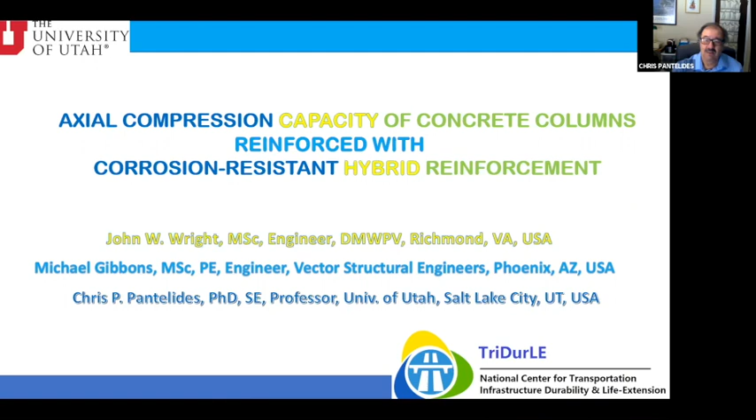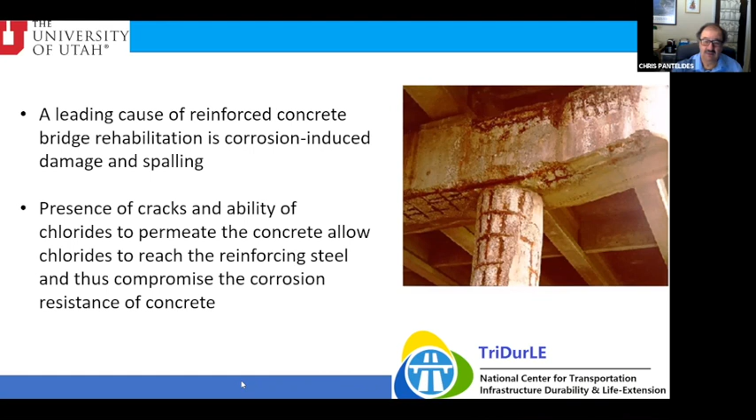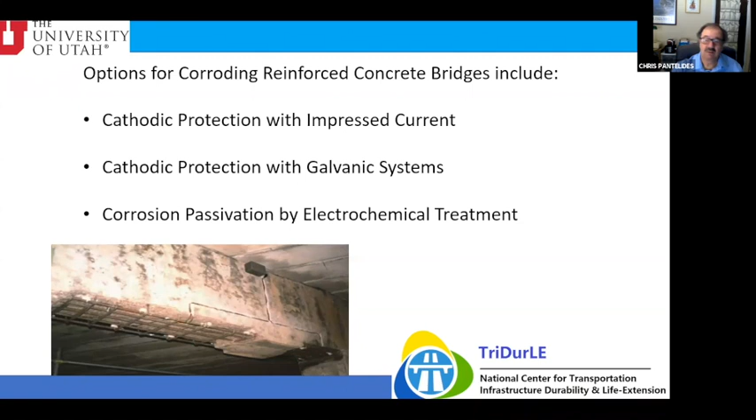Options for corroding reinforced concrete bridges include, as you know, cathodic protection with impressed current, cathodic protection with galvanic systems, and corrosion passivation by electrochemical treatment. Here, I'm going to show you today some alternative reinforcement options for new reinforced concrete bridges. This reinforcement will result in both initial and life cycle cost savings, as it will eliminate the need for replacement and could provide over 100 years of service life with minimal maintenance.

In this talk, I'm combining these two students' work on something called hybrid reinforcement for new concrete columns, which means glass fiber reinforced polymer. This could be in the form of a spiral or longitudinal bar. 2304 duplex stainless, which also could be in the form of spiral and longitudinal bar, and 316L stainless clad longitudinal bar - we were not able to obtain this stainless clad in a spiral. And of course, we have all carbon steel bars.

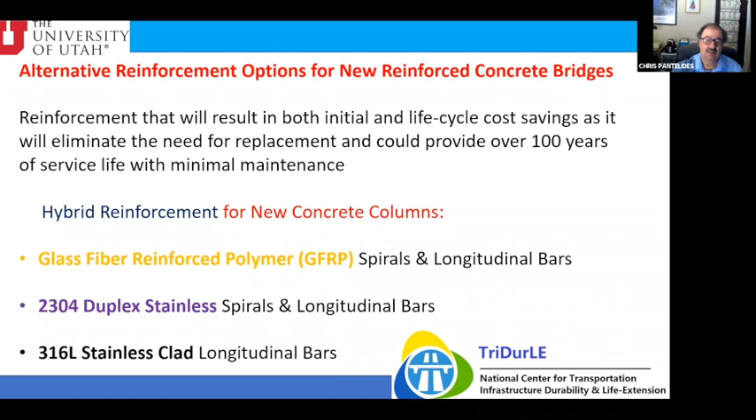First, for those who are not familiar, glass fiber reinforced polymer spiral and longitudinal bars. This material has been used in structural applications in both straight and fabricated bend form. It's a lightweight fiberglass rebar, a composite of fiberglass roving and resin that's impervious to corrosion. This is ideal for structures exposed to de-icing salts, seawater, other corrosive agents, weight or thermally sensitive projects, and projects that require electromagnetic neutrality. Actually, this last one was one of the first reasons this Aslan 100 fiberglass was used.

This Aslan 100 is stocked in 20 and 40-foot lengths from number 2 to number 8, and also number 10 diameter bars. Number 11 to number 13 diameter bars can be made to order. Here you can see a cast-in-place GFRP reinforced concrete deck.

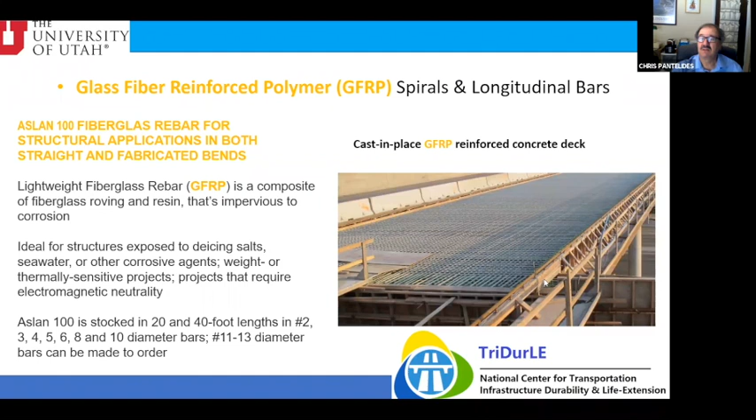So what are the properties? We've tested them. The ultimate tensile strength is 725 megapascal, it's a linear elastic material. Ultimate tensile strain is 1.6%. The compressive strength we measure indirectly, about 49% of the tensile strength.

The way we did that is by averaging the strain gauge readings from the vertical bars in the compression test of our column specimens. Measured compressive strain about 0.8%, elastic modulus 46 gigapascal.

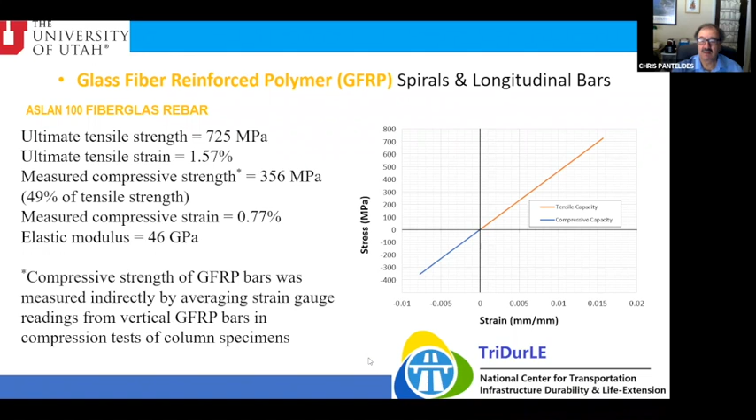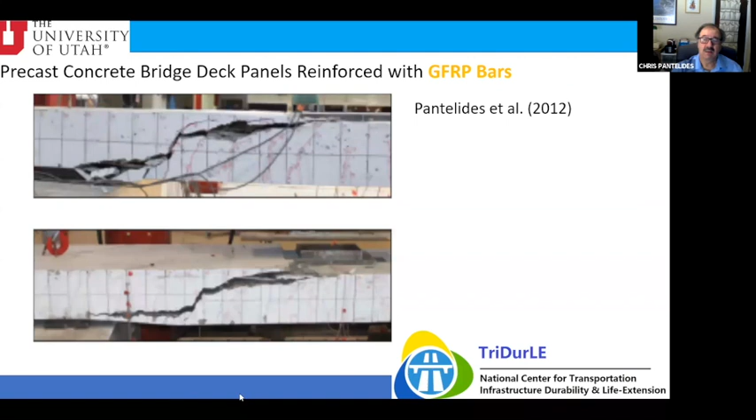Here you see some work we did earlier on precast concrete bridge deck panels reinforced only with glass fiber reinforced polymer bars. Later on, this work took form of an actual bridge on US 6 near Price, Utah. This was precast panels, about 45 feet long and 7.5 feet wide, and these were reinforced only with fiberglass bars.

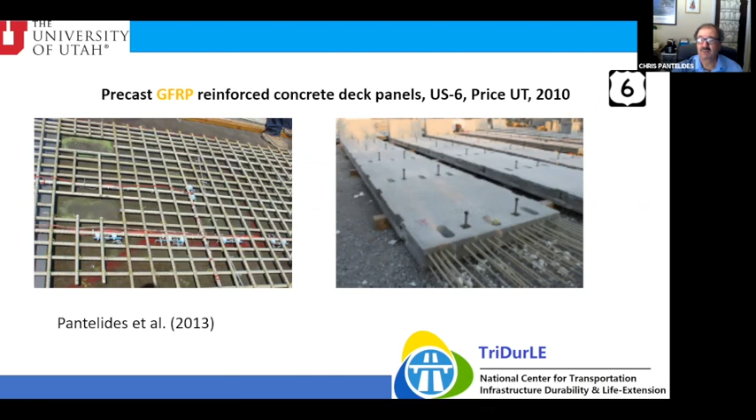These glass fiber reinforced polymer panels were then put on trucks and driven 130 miles to the site. You can see these panels being lifted where they were cast and being dropped on top of the bridge girders, just regular AASHTO type girders on this bridge on US 6. This bridge, by the way, has been in service now for 10 years with no sign of corrosion or any other degradation.

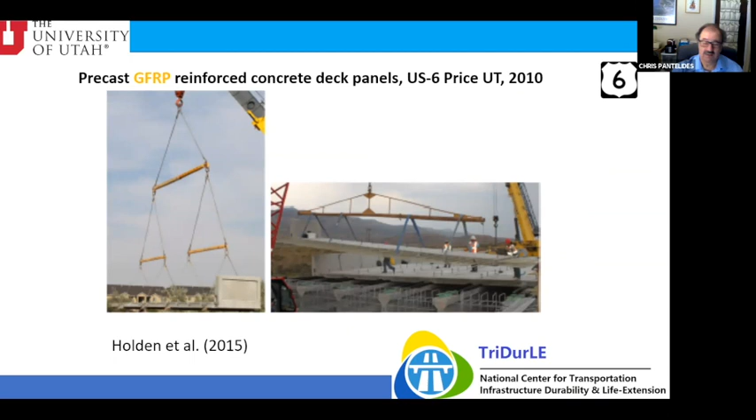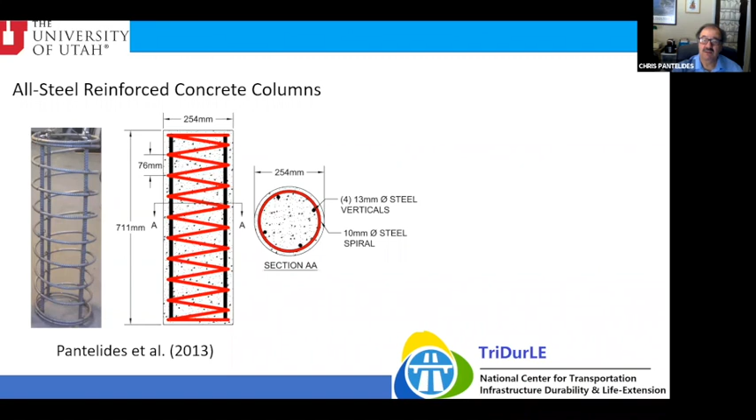Here it shows you the first study, the initial study we did for corrosion. This is the study that Mike Gibbons was involved in. You can see these columns are 254 millimeters diameter, 711 millimeters tall, and this is all steel, all carbon steel reinforced. You can see 4, 13 millimeter steel verticals and 10 millimeter steel spiral at 76 millimeter pitch.

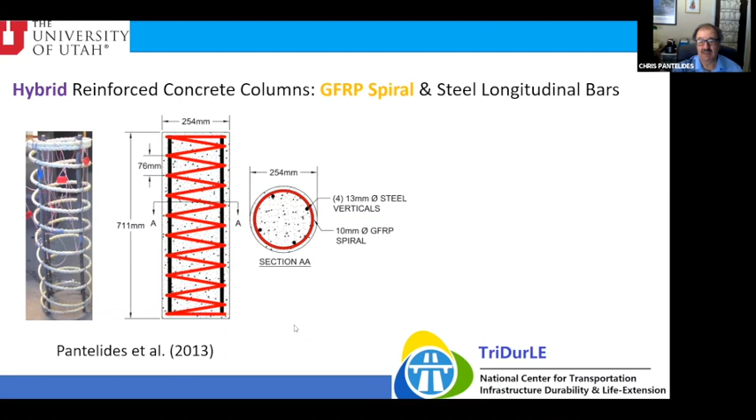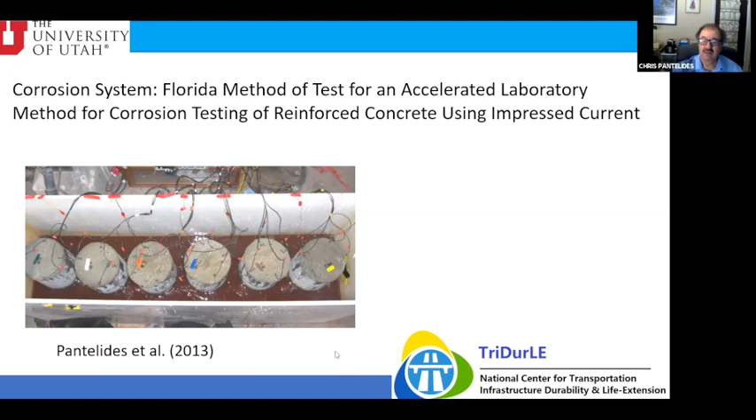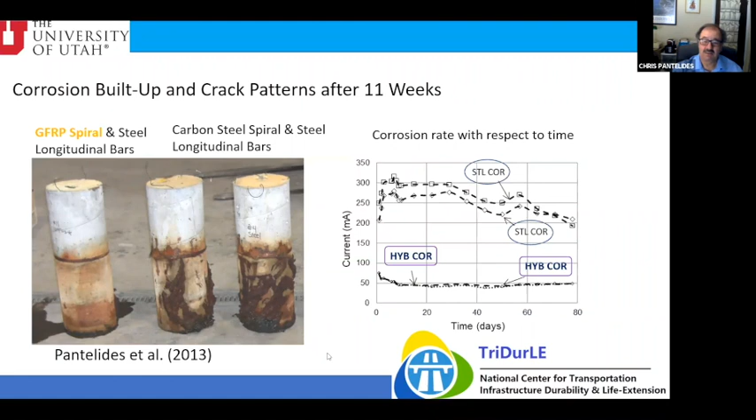After we did the corrosion test for about 11 weeks, we did axial compression tests. We put some steel collars to guarantee that fracture would happen at the mid-height of the column. Here you can see the results. The results of the compression test also help you see the corrosion inside.

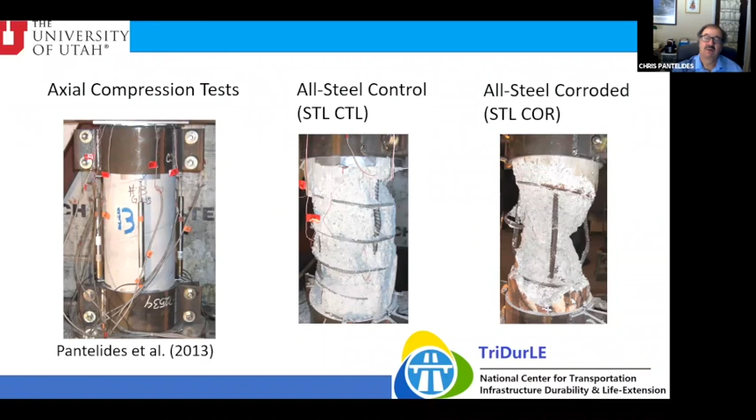This is the all-steel control, meaning this was not corroded. And here is the all-steel corroded. You can see that we can barely find where the spiral is, and of course you can see clear signs of corrosion on the vertical bars.

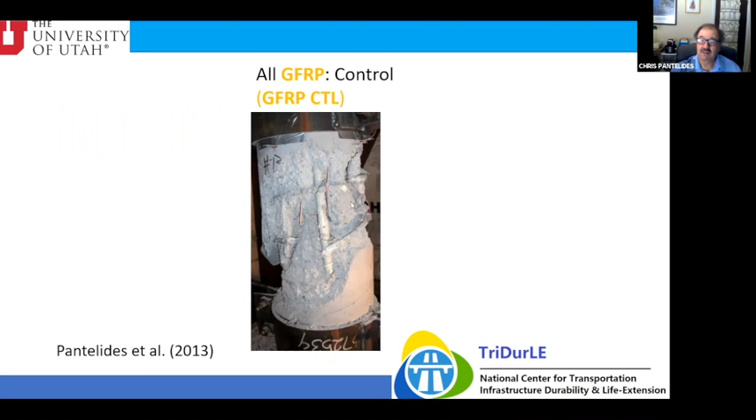And here is the one that's all fiberglass. This is the control. In this first series of tests, we didn't try to immerse it in water. We knew it wasn't going to corrode that much. But in the second study, we did immerse it, and again, you can see fracture of the spiral and some fracture in the verticals as well.

So in the second study, we thought we'll use some new materials. This is a Cladinox stainless clad rebar. This is available only as a longitudinal bar. It's 316 stainless clad, and you can see the inside core of this bar is actually carbon steel, but the surface is actually stainless.

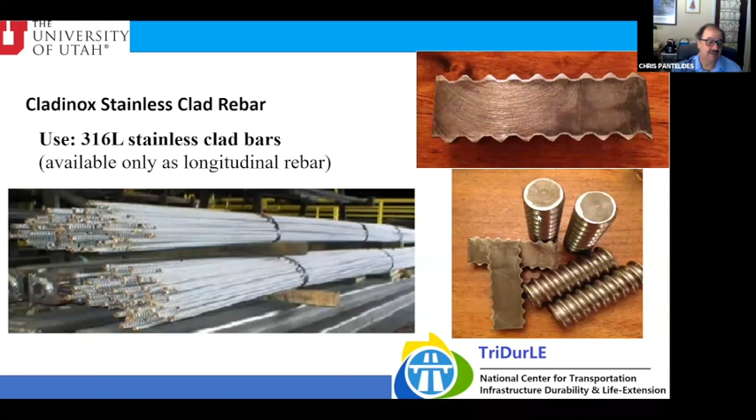So the Cladinox is a stainless clad carbon core, which is hot rolled to produce a very well bonded steel. There's a good metallurgical bond between the core and the cladding because of atomic interdiffusion into the stainless cladding and vice versa. It's a common interface, as you see here. This bond has both materials in the lattice structure and grows during hot rolling, spanning some 110 microns, or 0.11 millimeters, in the finished product.

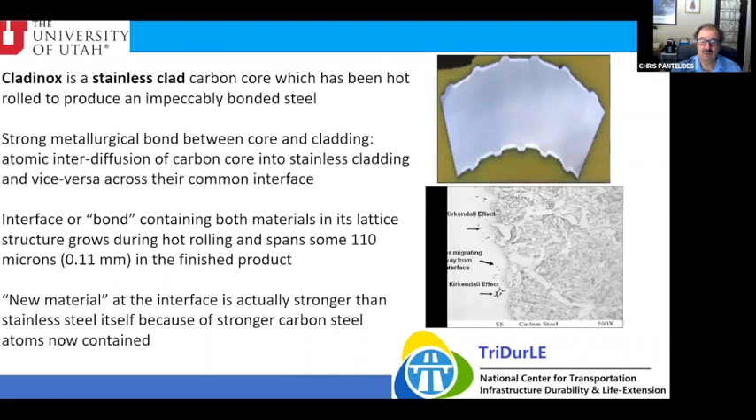So this is some kind of a new material at the interface, which is actually stronger than stainless steel itself because of the stronger carbon steel atoms it now contains.

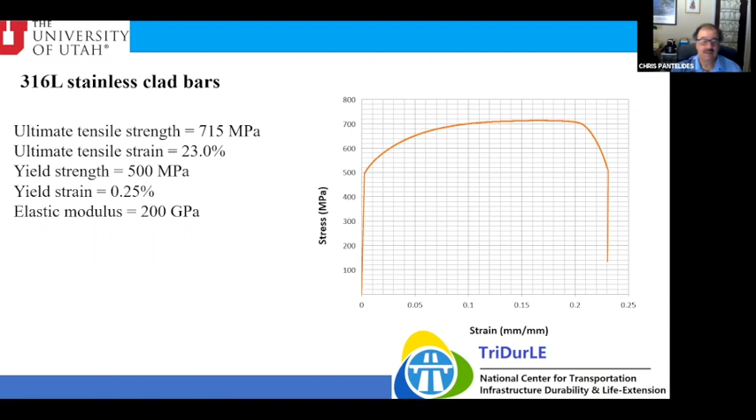So we tested these stainless clad bars: ultimate tensile strength 715 megapascal, ultimate tensile strain, though, unlike the fiberglass bar, is 23%. This one has a yield strength of 500 megapascal at a yield strain of 0.25%. Elastic modulus is 200 gigapascal. So it's definitely a ductile bar.

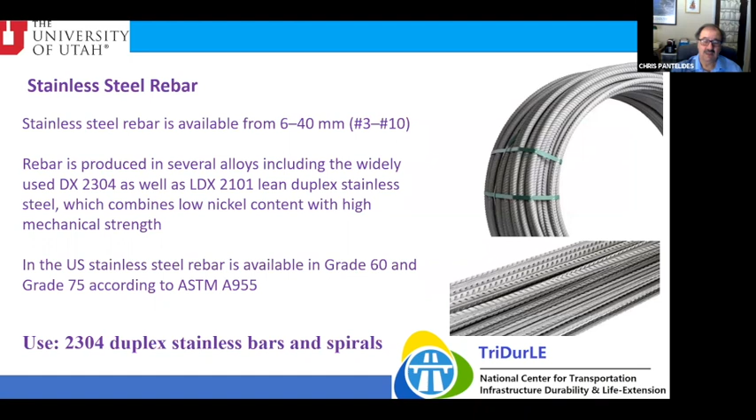And the third product we used was the stainless steel rebar. This is available from number 3 to number 10, produced in several alloys. We use the DX2304, which combines low nickel content with high mechanical strength. In the US, this stainless steel bar is available in grade 60 and grade 75.

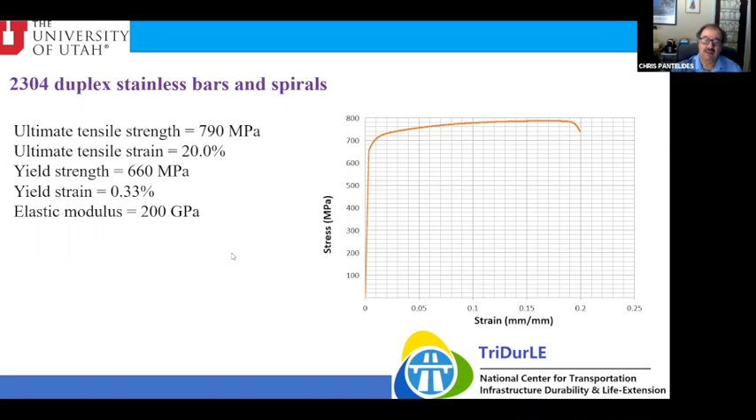So we tested this one as well, the 2304 duplex stainless bar and spiral: ultimate tensile strength 790 megapascal, a little more capacity but still plenty, ultimate tensile strain 20%, yield 660 megapascal, yield strain 0.33%, and elastic modulus 200 gigapascal.

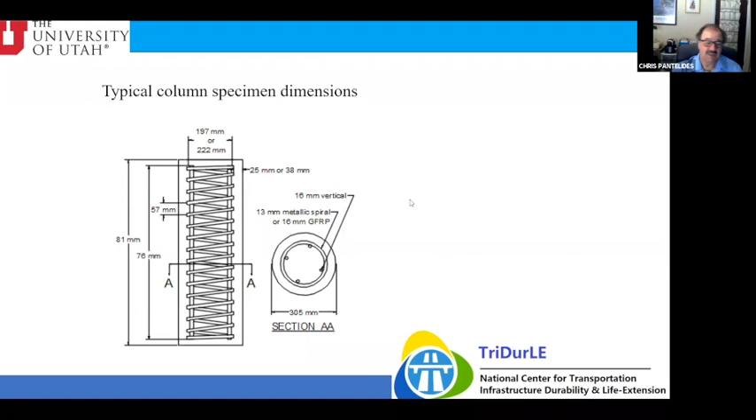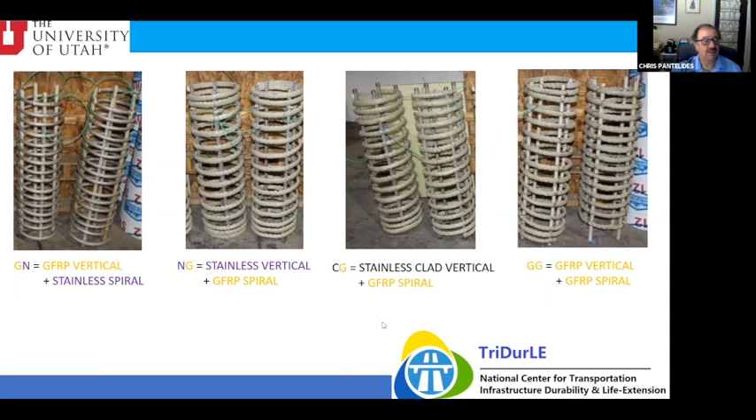So here is the test matrix. We had about 2 specimens for R, meaning corroded, except one series, the CG series. And then 2 control. For the stainless clad, we had 1 corroded and 2 control. For the all stainless, we had 2 corroded and 2 control. And for the all GFRP, again 2 and 2.

So I mentioned earlier that the bar diameter was a little bit different. For the vertical GFRP, we used 13 millimeter, and all the rest was 16. And then for the spiral, that meant the diameter would be a little bit bigger. We use 16 because the spiral with the fiberglass has a very low modulus, about 1/5 that of steel, so we need a bigger diameter of the spirals to get the same confining pressure. Stainless, of course, is just a 1/2 inch diameter.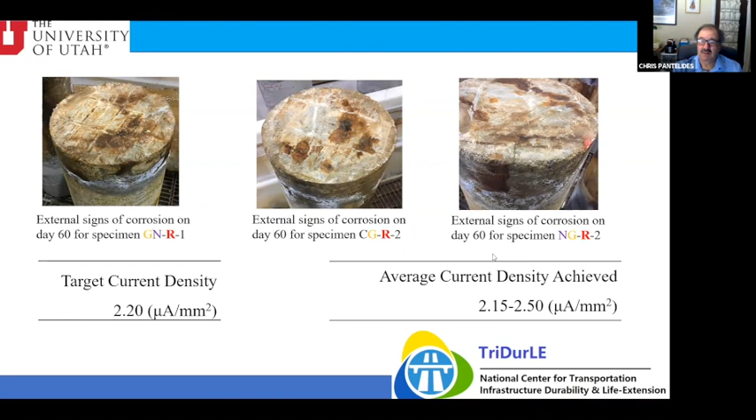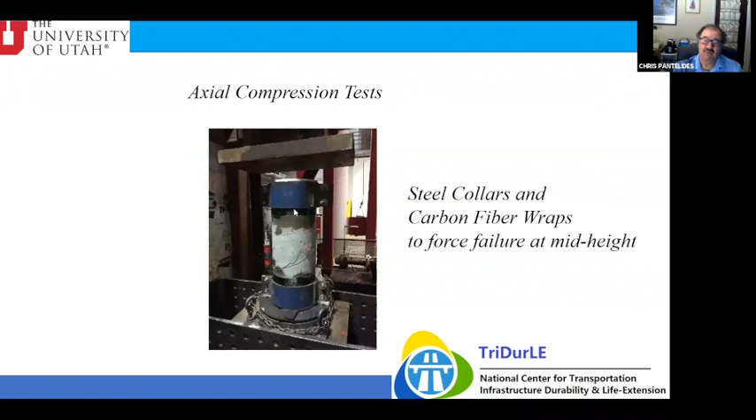So then we did the axial compression test, and we put some carbon fiber wraps and the steel collar so the failure would be in the middle. I have a little video here, I will show you some of it.

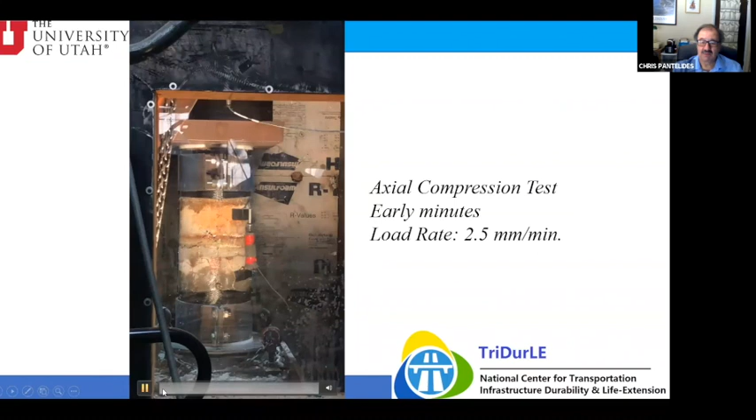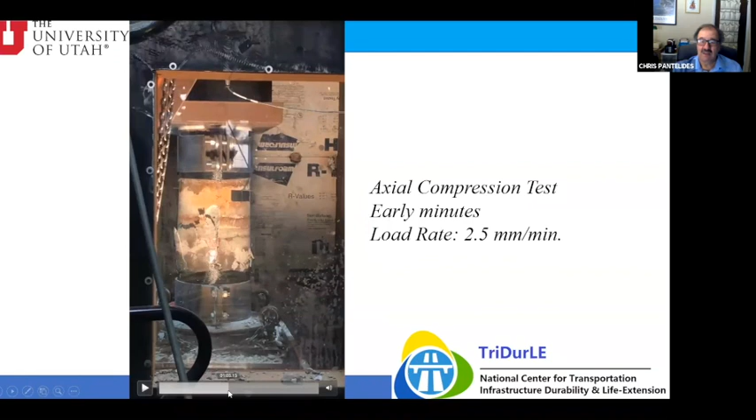And we had some visitors from the main office, the staff who came to see finally how we break these things. These are early minutes for this test, which lasts about 6 minutes. You can see here the spalling that happens. It's a very slow rate, 2.5 millimeters per minute.

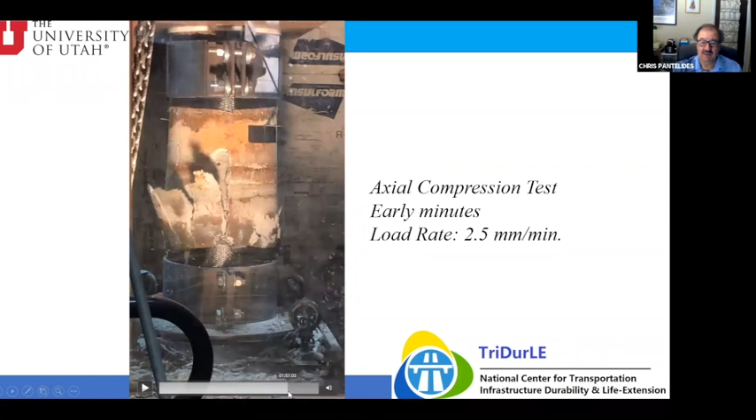But you can see this is one of the hybrid columns with the fiberglass spiral, and you can see this starting early here. And then this next one, actually, I'm going to play it. It's a little loud. This is where the spiral fractures.

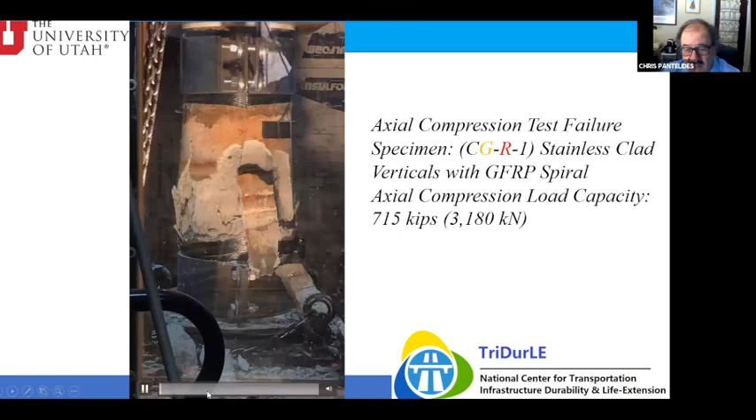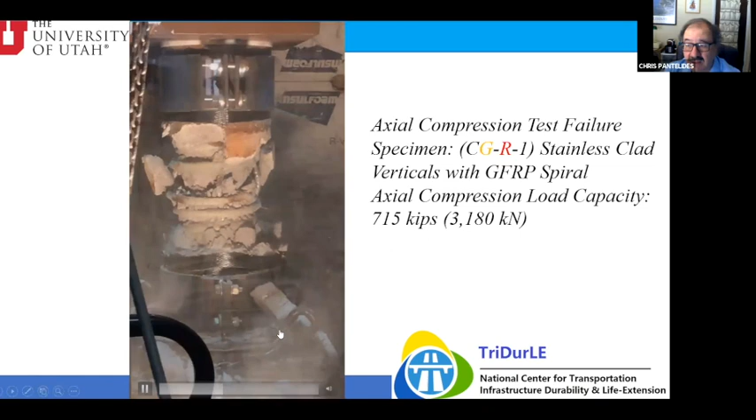And you can see the fiberglass spiral and the verticals. This has the clad verticals. And the axial load here in this test, the capacity was 715 kips, 3,180 kilonewtons. You can definitely see the discoloration of the spiral, but it seems like the clad bars are holding pretty well.

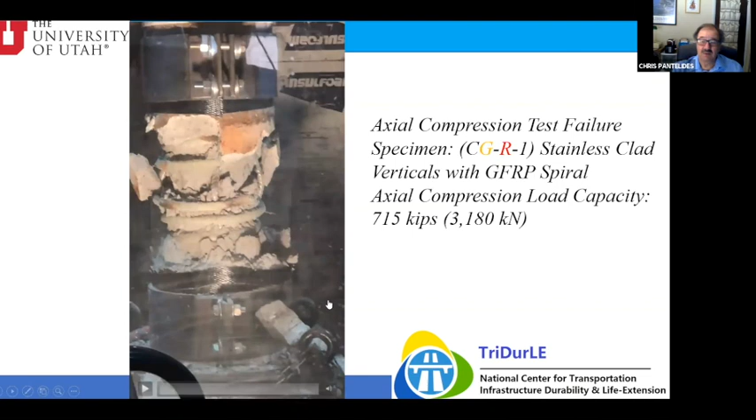So here are some results for all 4 different types of the specimens. You see there is some damage, significant damage actually, for the stainless steel spiral, which may be surprising, but even stainless steel can corrode, as you can see here.

Here you can see staining on the fiberglass spiral, even though the vertical is supposed to be stainless, but after 60 days, it did corrode some. Here you see this is the one that's all fiberglass reinforced, and you can definitely see no staining anywhere because it doesn't corrode, but that doesn't mean it doesn't suffer from water damage. We'll come back to that in a little bit, and definitely you see the fracture of the spiral.

And this last one is actually the one with the clad vertical. This is similar to the video I showed you. And there is some staining here as well as staining byproduct of the fiberglass spiral.

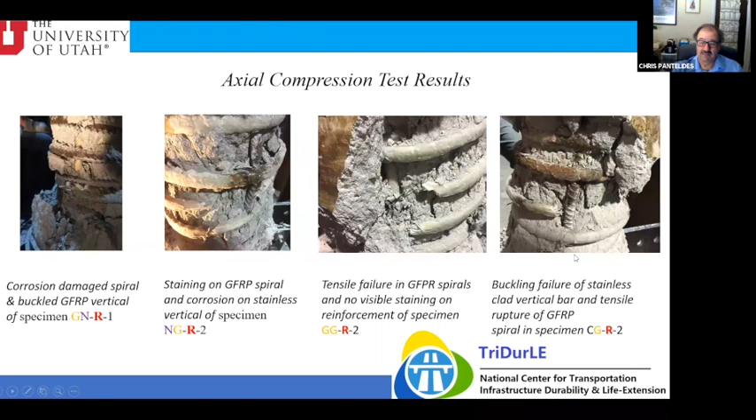This is the all fiberglass, and something we didn't expect, we actually see some drop in the peak load capacity and the displacement capacity of the ones that were exposed to water, which means even though this is all fiberglass, it seems like the water actually can do some damage to the fiberglass.

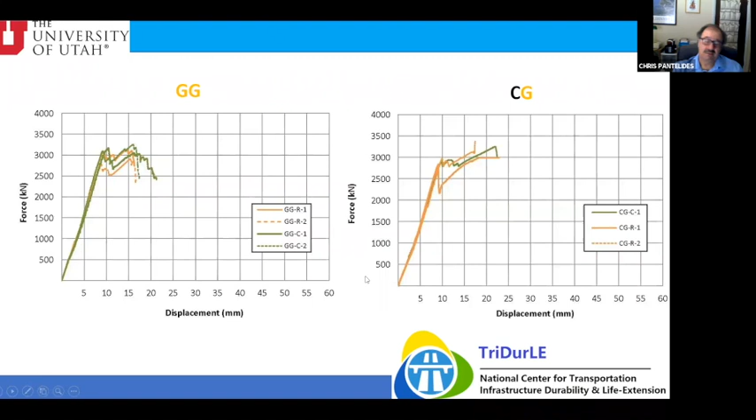And this is the one with the clad vertical and the fiberglass spiral. Again, we see a little bit of influence of corrosion, but definitely these three types with the fiberglass spiral barely reach 20 millimeters of axial displacement, whereas the one with the stainless steel spiral reaches almost twice that. So the displacement capacity of the stainless spiral is very obvious.

Here's a comparison of all the control columns, including all four different types. You can see again, the ones with the stainless spiral actually displace quite a lot. As far as the peak load, they're all pretty much in the same range. Perhaps the ones with stainless verticals do a little bit better than the others, but pretty much in the same ballpark.

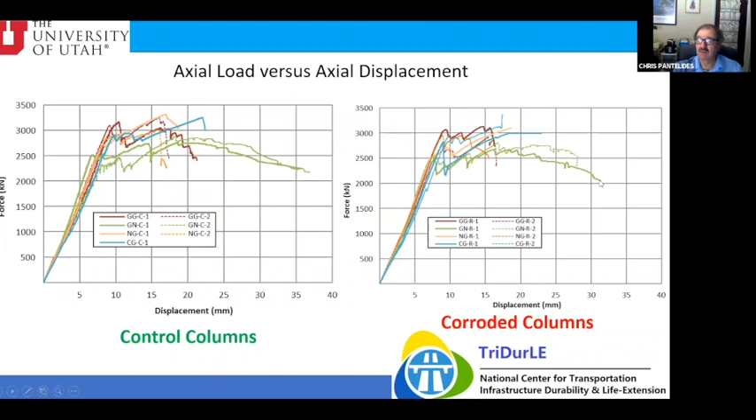And then here you can see the ones exposed to the water. They all drop compared to their control counterparts. But again, we see that the one which has the stainless steel spiral is the more ductile of the specimens.

So some early conclusions of this study, we just completed it. The failure mode for the all steel control columns was buckling of the vertical steel bars. For the corroded all steel columns, the failure mode was fracture of the spirals and then buckling of the vertical bars.

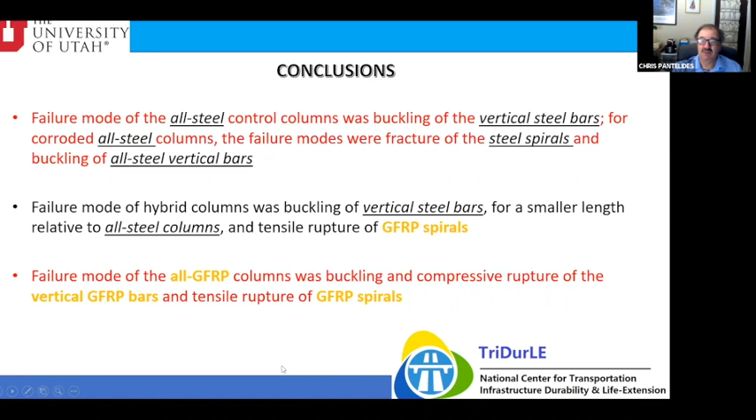This is an important conclusion because actually all steel has a little bit less tensile capacity than fiberglass. On the other hand, fiberglass is very brittle - less than 2% strain. So this kind of result makes sense.

Also, as I mentioned, because the spiral has a very low modulus of elasticity, about 1/5 that of black steel, you need to actually put more material, a bigger spiral, to achieve the same capacity as you do with the all steel columns. Of course, another thing you can do is also reduce the pitch, the spacing between the hoops.

So for corroded hybrid columns with GFRP spirals, there was no visible detrimental effects to the carbon steel bars. Most of the corrosion observed in the all steel reinforced columns occurred in the carbon steel spiral. So the fiberglass spiral increases the protective barrier to the all steel vertical bars.

And it goes like this: if your spiral, which is on the outside of the reinforcement, doesn't corrode, then how are the chlorides going to penetrate and find the vertical steel bars? It makes it more difficult. It's a barrier, and then there's no byproduct. So the cover actually stays pretty intact, as I showed you in the picture. So there's no initial spalling. If there's no initial spalling, then the vertical bars are somewhat protected.

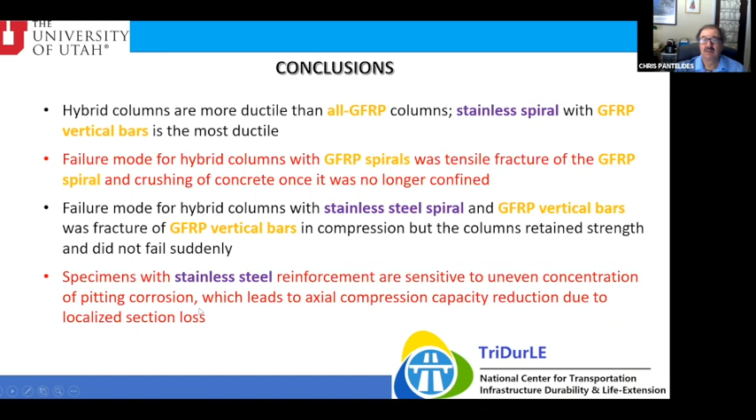Degradation of the stainless clad vertical bars due to saltwater exposure was minor, and the submerged columns with stainless clad vertical bars and fiberglass vertical bars had no appreciable drop in axial load capacity.

Degradation of stainless steel spiral due to saltwater exposure exists, and the submerged columns with stainless steel spiral and fiberglass vertical bars had about a 3% drop in axial load capacity.

The degradation of the stainless vertical bars due to the saltwater exposure exists, and the submerged columns with stainless steel vertical bars and fiberglass spirals had about a 4.5% drop in axial load capacity.

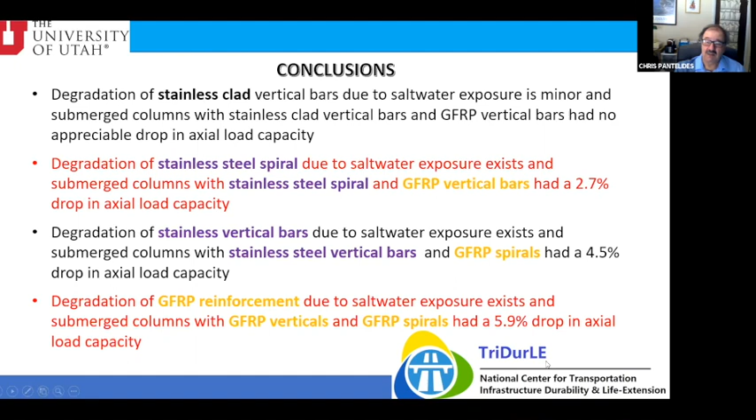So we also saw that GFRP reinforcement can degrade in saltwater exposure, and these all fiberglass, both verticals and spiral, columns had about a 6% drop in axial load capacity.

So comparing these two studies, the experimental results from the previous study are comparable, where we had compression capacity reduction of the all carbon steel columns ranging from 13 to 24%. You would expect that because even the mass loss ranged from 16 to 18%.

But the compression capacity reduction of the hybrid specimens with the all carbon steel vertical bars and the fiberglass spiral was about 5%, and the corresponding mass loss was 7%.

So obviously we used a very small number of samples here, and there needs to be more extensive research, also for larger column specimens. The specimens that seem promising are the ones reinforced with stainless clad vertical bar confined with fiberglass spiral. Of course, we also need additional research regarding the performance of such columns, not only under axial loads, but also under lateral loads, cyclic loads simulating earthquakes.

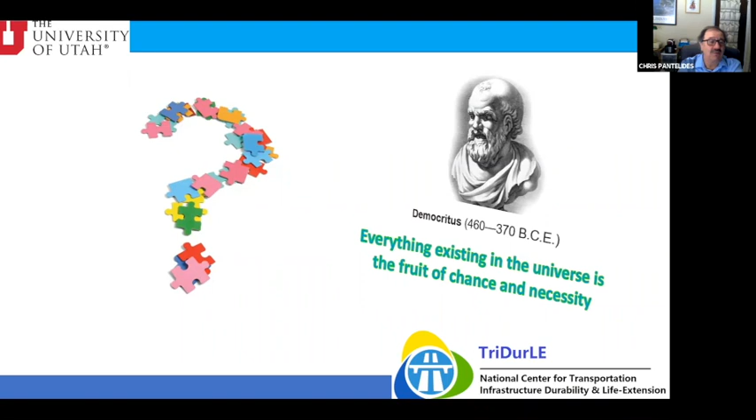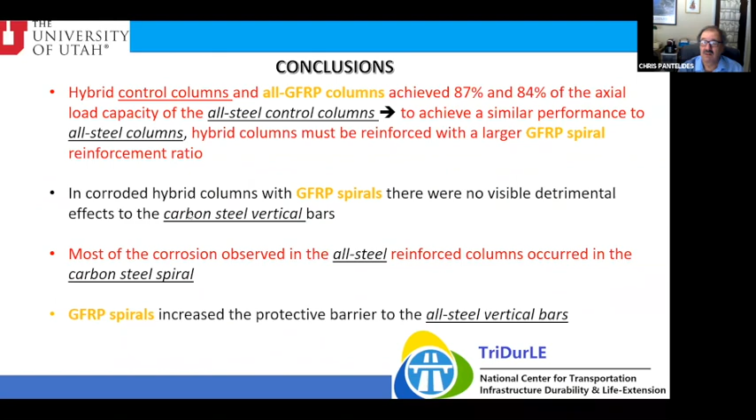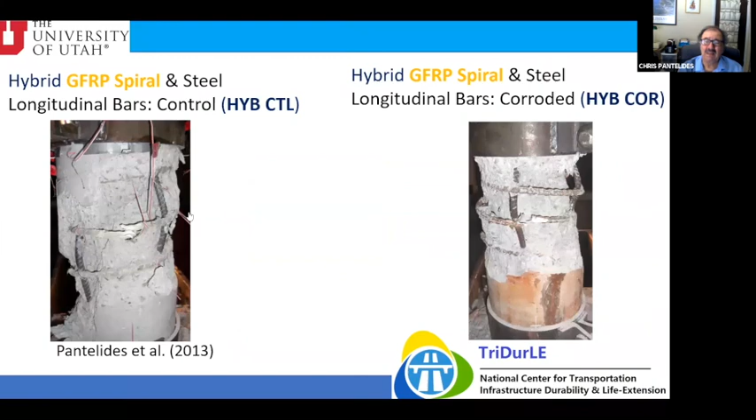Of course, most bridge engineers would be worried that this is very brittle failure. But you can design so it doesn't fail brittly, and I think in a seismic situation, this would be a very nice thing to explore - that the fiberglass bar actually wants to come back to vertical after an earthquake. So maybe with a little bit of self-healing or whatever, this could achieve a fraction of the original load bearing capacity, if we reload.

Yes, I think that could be another opportunity here. The main reason we use the fiberglass spiral is because we believe it protects the vertical steel from corrosion. Because corrosion, as you know, will have to come from the outside. My belief is that if you have the fiberglass protecting the vertical steel, it's much harder for the chlorides to attack it. You're actually creating an extra barrier for those chlorides to go in. And even if they go in and attack the vertical steel, the byproduct probably isn't going to push out the concrete, the volume expansion that you normally see in all steel reinforced columns.

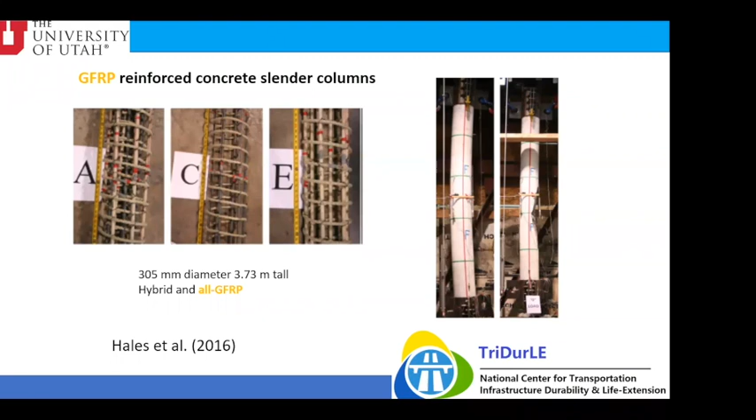I'm familiar with, for example, carbon fiber polymer sheets. When we retrofit a bridge, we try to stay away from metal. We try to separate them. Yeah, you're right - the metal could be sacrificing itself to protect the carbon, which is basically pumping electrons to the carbon. Interesting. Okay, all right.